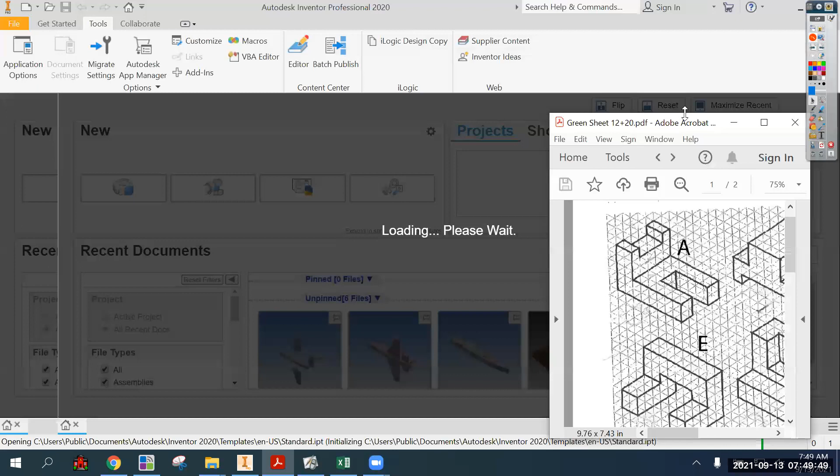So we'll start with a new part file. The first one we're going to do is part A, which we're going to do with a subtractive method, starting out with a big chunk. This is the method we'll use for most of the parts, where we start with a big chunk, the maximum dimension in all three dimensions, and then cut away what we don't want.

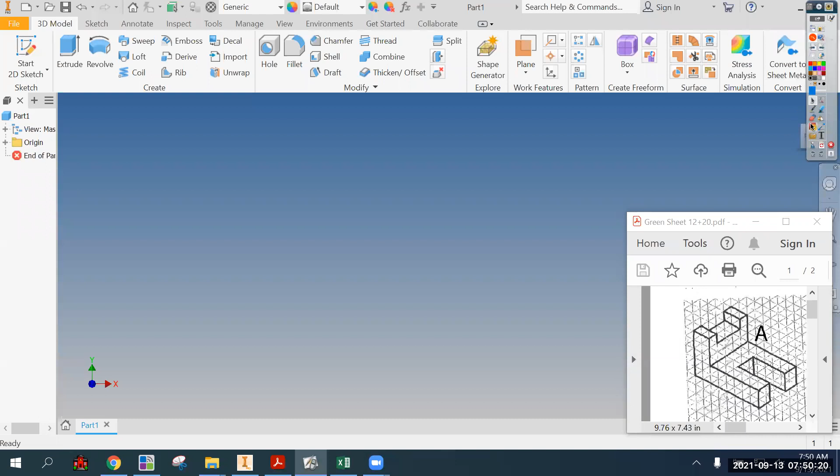We'll be doing this with each isometric grid at 1 inch instead of 1/4 inch, which is what it says at the top of the sheet. So the first sketch we need to make is this front, which is 5 by 8, and we need to extrude it 5.

So we'll go start 2D sketch and get a 2-point rectangle, and dimension that to 8 wide and 5 tall. Hit home on the keyboard to zoom out. Wait, that's supposed to be 5 tall.

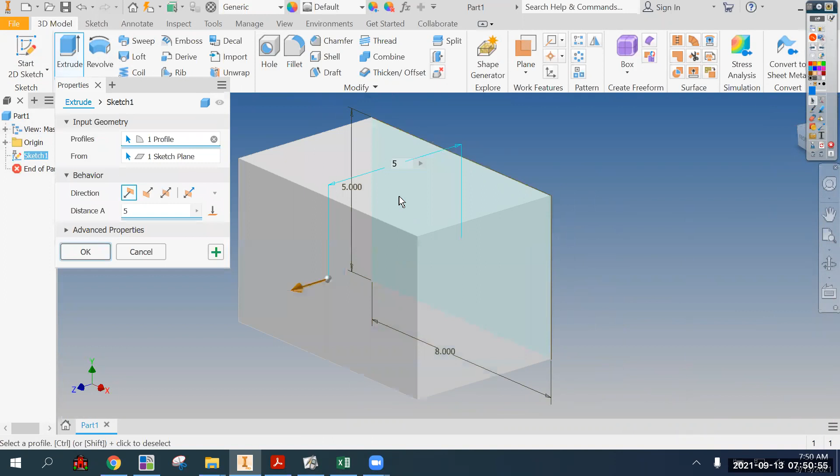And finish sketch and extrude it 5. Next part, let's cut out the L.

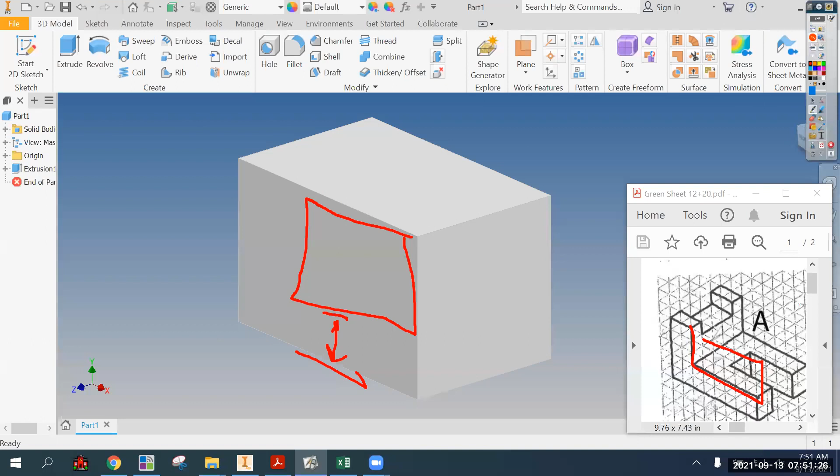We could do this a couple ways. We need to make a rectangle in the top right corner of the front face, but we could dimension the length of this line to get the height, or we could dimension the distance from the bottom — dimensioning the remainder, it doesn't really matter. So we'll do it like this, and because we need a remainder of 2 on each side, that's how we're going to dimension the rectangle.

But we need to start this rectangle from the top right, and this dimensioning is the 3-click dimensioning, where your first click is on one line. You have to think about what we're actually dimensioning: the location of this side of our new rectangle, the distance from the line to the edge. First click, second click, third click in between. Same thing here, first click, second click, third click in between.

We'll finish sketch, extrude, choose the rectangle we want to cut and switch it to cut. Through all is best practice, but anything 5 or bigger for this is fine.

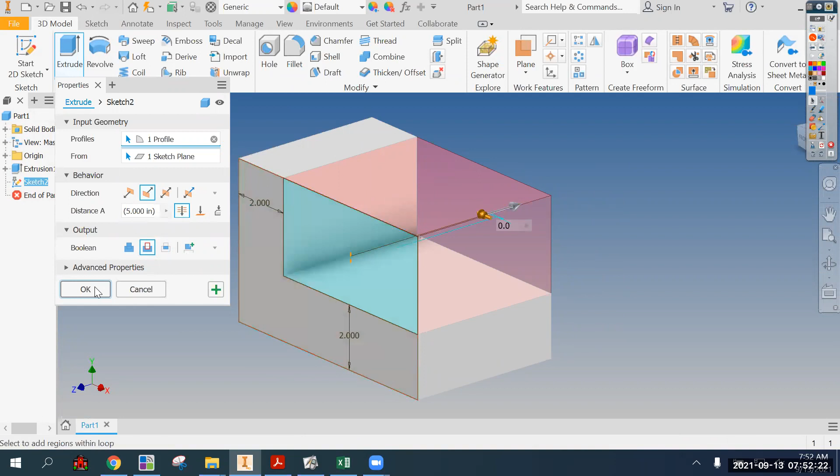That's our first cut. Second cut is going to be this rectangle here, which is 2 by 4, cut all the way through, and we're going to draw that rectangle right here. But the key is that...

We can do that same thing where we're dimensioning the remainder, and the remainder here is 1.5. It's 1.5 here, those are each 1.5, and it's 2 here, and that's all we need to know, so long as our rectangle is flush against this edge.

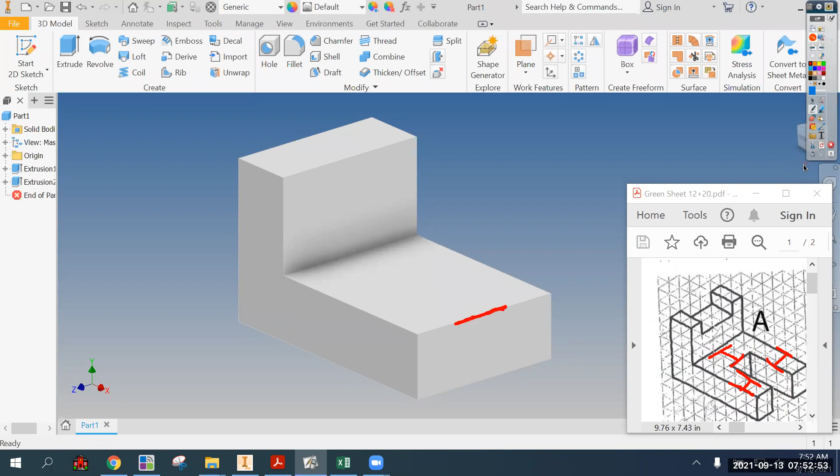So we're going to start a sketch on this face, and you don't have to rotate it, but I think of the shape more in this direction. I'm going to do this rectangle here, making sure I don't snap it to the corner or to the center point, because I won't be able to dimension it then.

Let's dimension the distance from here to here as 1.5, and the distance from here to here as 1.5, and you can sort of see where we're getting those dimensions. When you are in sketch mode and the grids are up, you should really be looking at it straight on, but just to give you an idea of where things are. Then this last part is 2 from the edge, and you can tell you are done dimensioning if it says fully constrained.

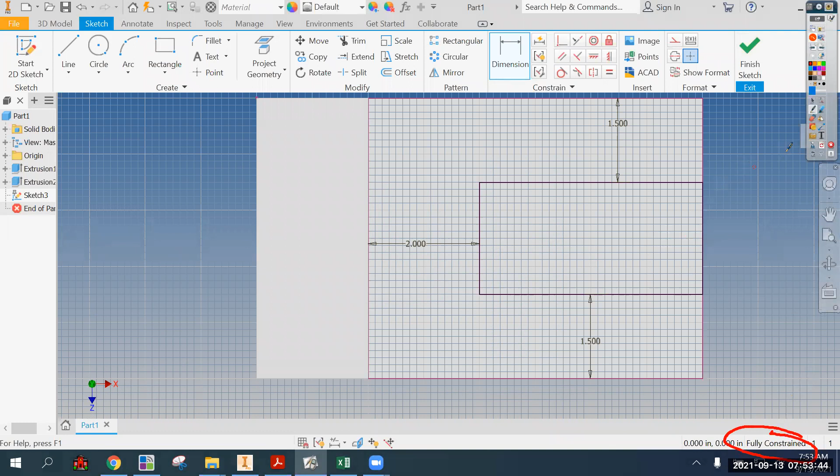And we have that. So now we can finish sketch, extrude, choose our new rectangle, switch to cut, and again it doesn't matter if it's 5 inches, 1,000,000, or through all. The last bit is a rectangle here that is 1 by 3 and 1 inch from the side.

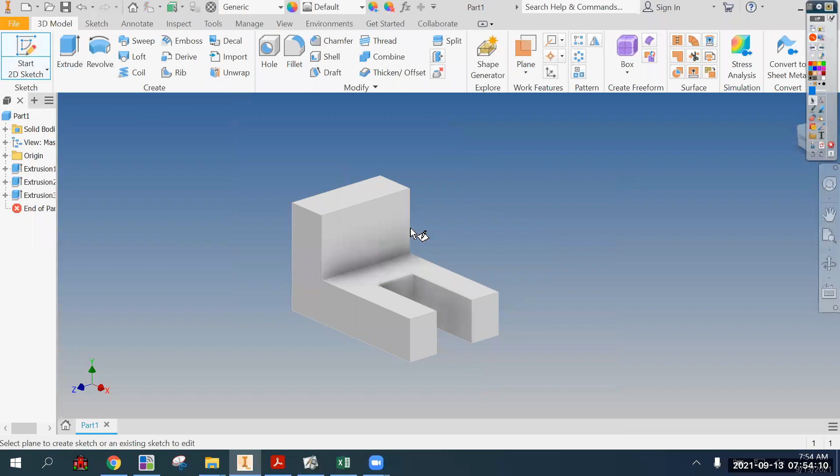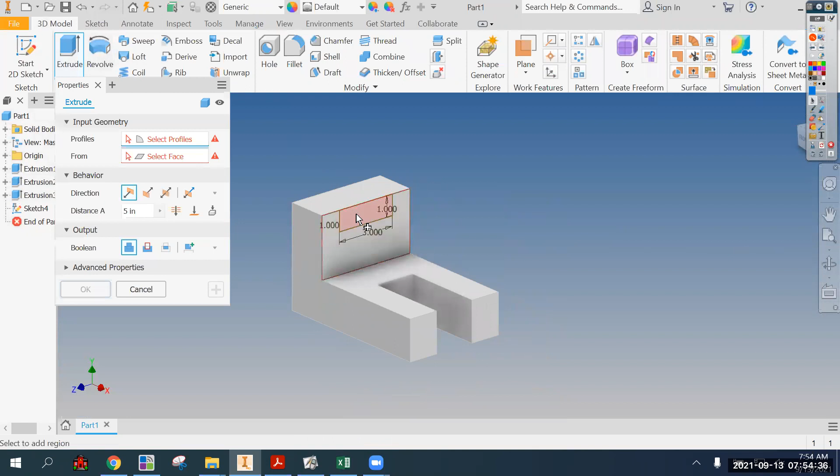And we'll do a rectangle here, and we'll just dimension it, 3 wide, 1 tall. You can see 1 dimension needed down at the bottom - we need to dimension the location of the rectangle, the distance from one side to the side, and everything is 1. We'll finish sketch, extrude, choose the rectangle we want to cut, switch to cut, through all, hit OK.

And there's part A. Okay, new part. We're going to go through these in alphabetical order, but that's not necessarily the order of difficulty, but we'll figure it out as we go.

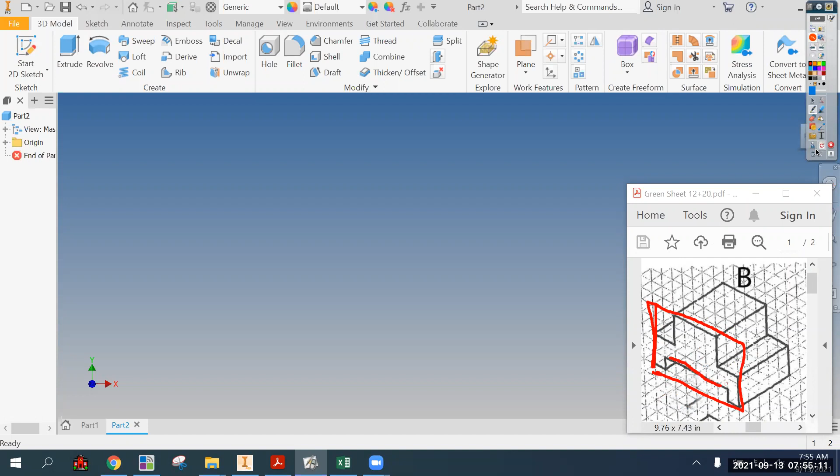This one I'm going to do in a single sketch. Well, no, that's not true. It's going to be 1 sketch and extrusion for the block, which is actually 5 tall and 8 wide. But it's kind of difficult - the isometric lines are more difficult to see when they are not an integer in height.

They're 2.5 tall here, and this line is 2.5, so the total height is 5. So it's 5 by 8 extruded 5 for our starting sketch.

Rectangle, 5 this way, excuse me, 8 that way, 5 this way. Finish sketch, extrude, choose that, switch, extrude it 5. And then we can do the cutaways in a single step.

Just like the last cut on part A, we have a small shallow rectangle here that's 1 tall, 6 wide, and 1 from the side. So it's going to be something like that.

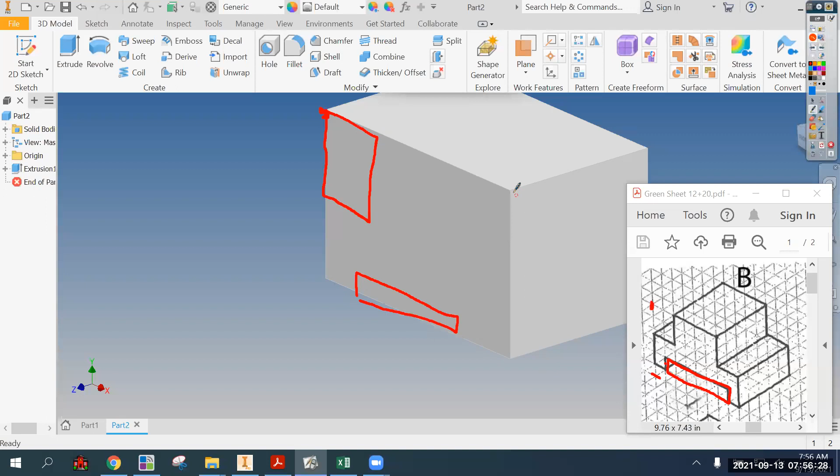And then we have symmetrical rectangles here that will start in the top corners, and they're 2.5 tall and 2 wide, which you can tell from the size of the remainder there.

And we can do all 3 of those rectangles on the same sketch because they are all extruded the same distance, which is cut all. So we have 1 rectangle here, 1 rectangle here, and 1 rectangle that's just across the bottom.

And so this needs to be 2.5 tall and 2 wide. Same thing over here, 2.5 by 2. And this is 6 wide by 1 tall and 1 inch from the side.

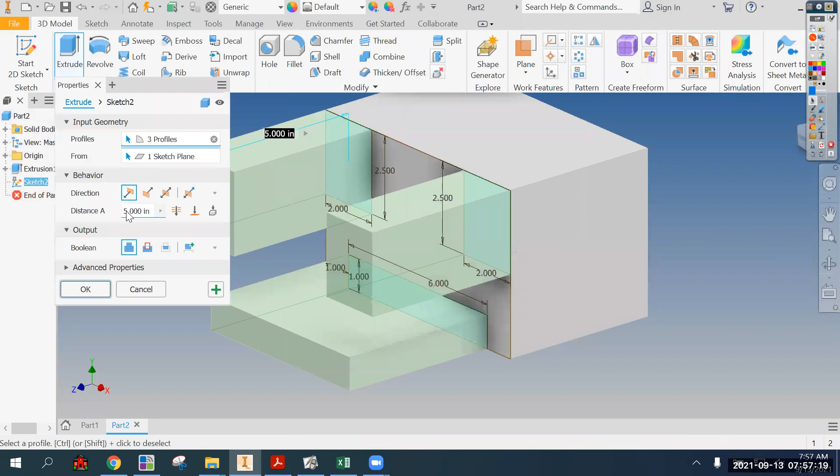3 click dimensioning there. And we can finish sketch, extrude, choose this, choose this, choose this, switch to cut, through all, hit OK, and there you go, part B.

Next one, part C. We'll do this in 3 steps: one step for the entire block, which is 6 by 9, extruded 4. Then a 3 by 4 rectangle, cut extruded 2. And then we'll do a 2 by 2 rectangle on the top and cut extrude all the way through.

So we'll do new part, sketch on XY plane because that's the front. And we're going to make this 9 wide and 6 tall. Finish sketch, extrude, and extrude it 4.

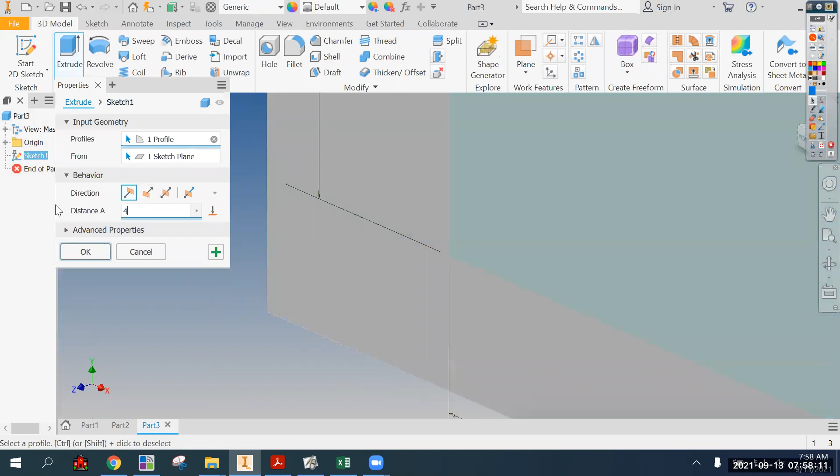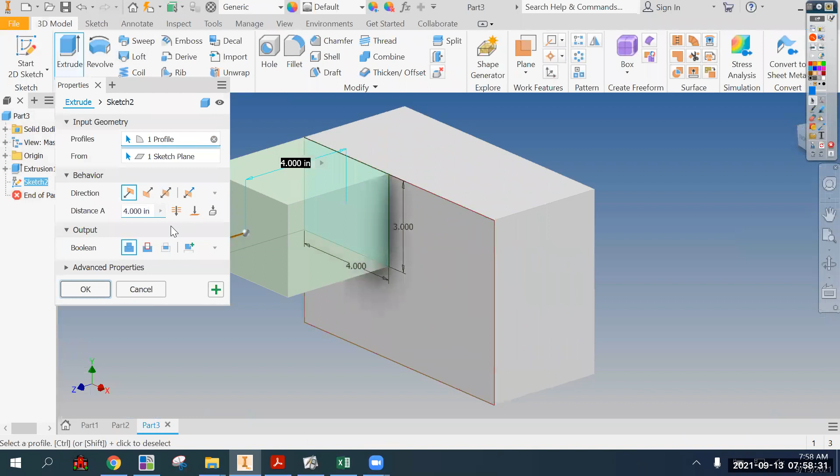Then we'll start a sketch over here, top left corner, and we need to dimension the height to 3, the width to 4, and finish sketch. Extrude, choose that, switch it to cut, and we only want to cut 2 towards the back.

Then for the other one, we'll put a sketch here. I'm going to spin it to look at it this way. And the cut is going to go here.

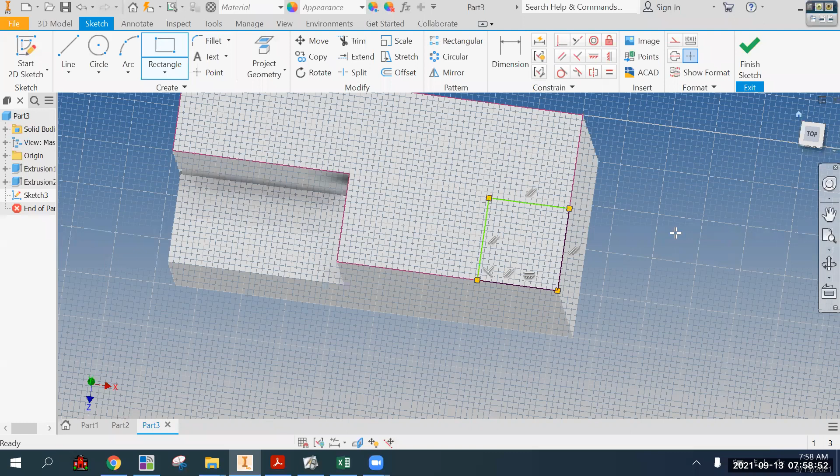And you'll see where we're sketching in this front top right corner. We'll dimension it to 2 wide and 2 tall. We'll finish sketch, extrude, choose that, switch it to cut, and we do want to cut through all on this one. There's part C.

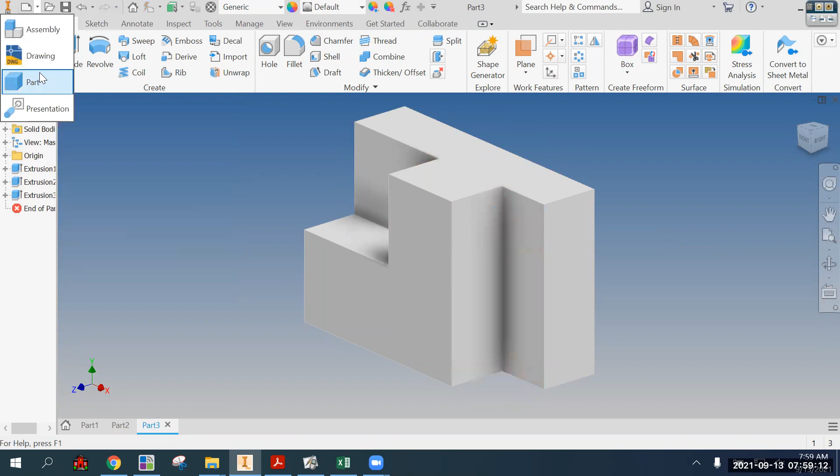We'll get through all of them, don't worry. D is - I'm going to do it in 2 steps, but no cutting, just creating.

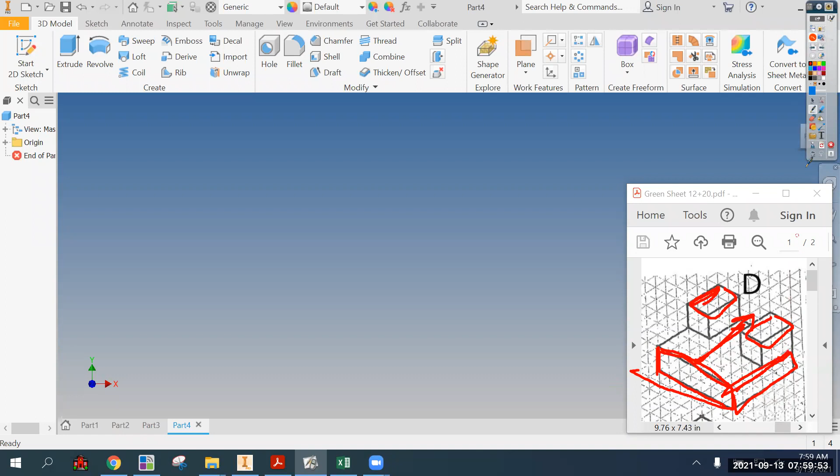First step, I'm going to make a rectangle that's 2 tall and 6 wide and extrude it 7. No, wait, 2 tall and 7 wide, extruded 6. That's important to note because that's just going to make this small bottom step. But these 2 blocks that pop up on top, their long side is on the shorter side of the base. But we'll figure this out.

Let's make a rectangle that is 7 wide and 2 tall. And that looks like that - it's pretty wide. Finish sketch and extrude it 6.

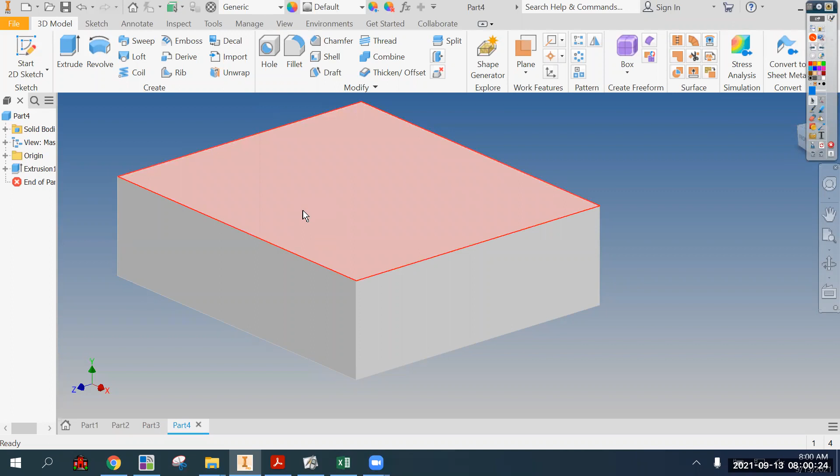I'm doing a recording, like I'm trying to get a... Wait, so you're recording right now? This is one take.

Thanks. All right, so then we need to do both of those blocks on top, and they are 2 by 3 - 3 this way and 2 this way. Same thing over here, 3 this way and 2 that way, where it's very easy to put them on the other side and have them be wrong.

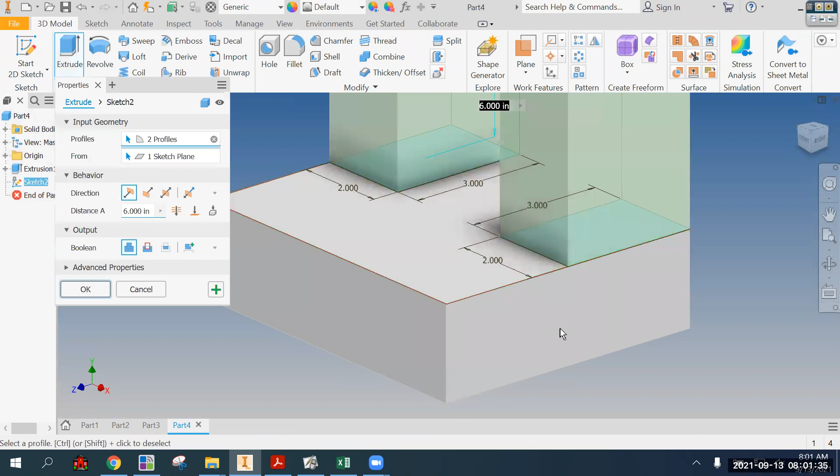So let's put a sketch on top. Again, for some reason it always twists 90 degrees off of the way I think of things, but that's up to you. Either way, we have one rectangle there and another one there. We'll dimension these - they both need to be 2 wide and 3, well, 2 that direction. Technically 2 wide and 3 deep because of what face we started on, but not super critical. We'll extrude that, and they are just a height of 2. There you go, part D.

New part, part E. Okay, part E - we'll do the full block this time, 5 tall and 8 wide, extruded 5.

Then we will cut out sort of the L shape, which is a 3 by 3 rectangle or square here, and cut it all the way across. And then the last part is kind of tricky where we'll put a sketch on this step, but the rectangle needs to be taller than the snap that you'll get automatically. Otherwise this cutout won't be correct.

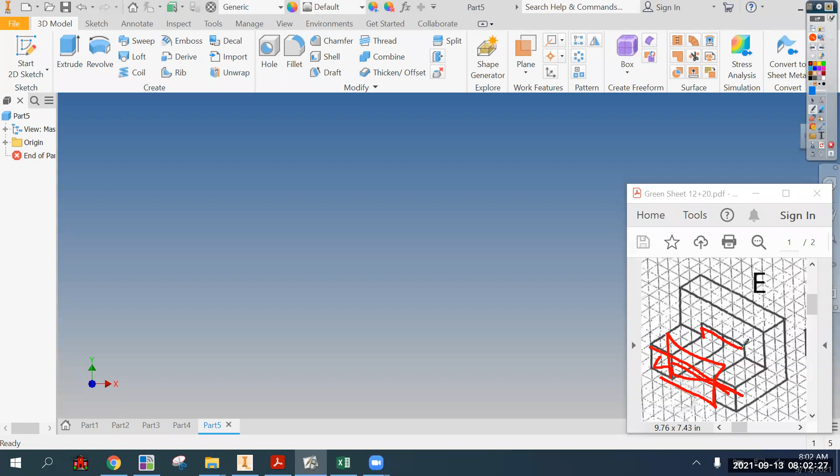So we'll start a sketch and let's make a basic rectangle for our block. It needs to be, what do we say, 8 wide, 5 tall. Finish sketch, extrude it 5.

Okay, then we're going to put a sketch on the side here that on the top front corner needs to be 3 by 3. Finish sketch, extrude, choose that, switch it to cut through all.

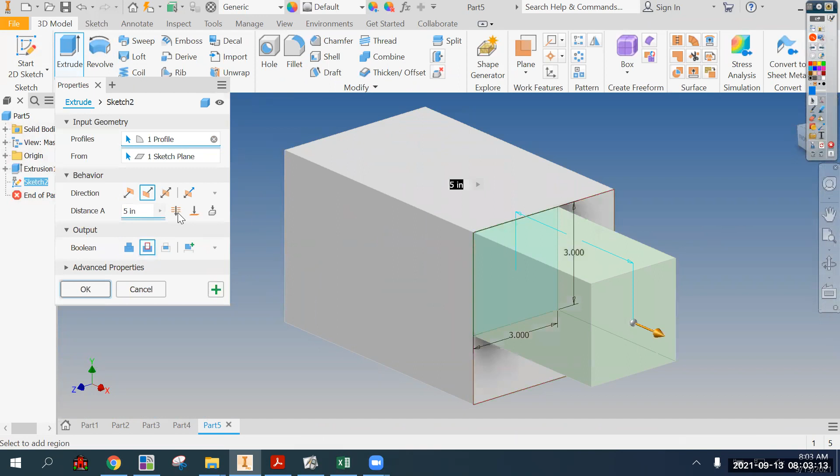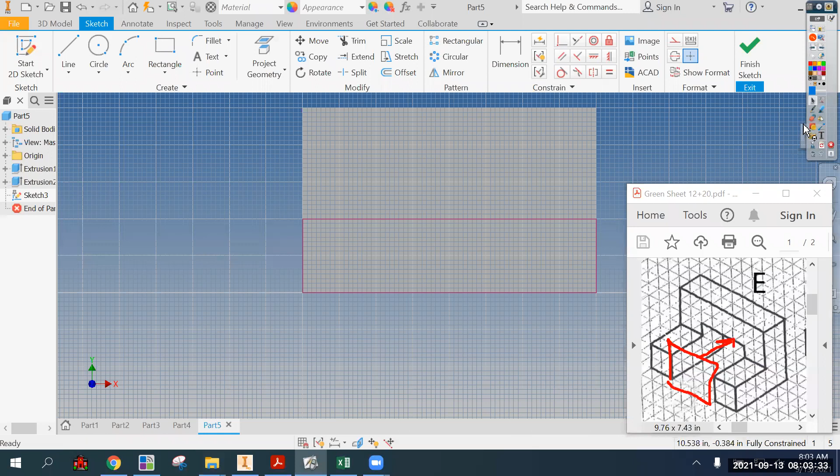Okay, and then we'll start a sketch here to do that undercut part. It is important that the height of this cut - because this rectangle we're drawing here on this face needs to cut all the way through. If you draw that rectangle so its height is on this front edge, the cut through won't be that extra one tall. I suppose you could do it in 2 steps, but there's no reason to.

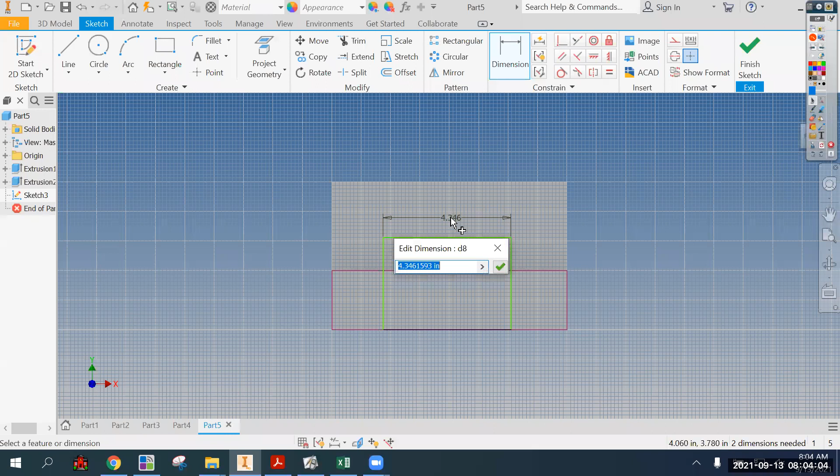Okay, so we're already sketching on this front. We need a rectangle that's flush with the bottom, but needs to be taller than this. Otherwise you won't be able to dimension it. You actually need to create the rectangle that size. And the rectangle is 4 wide, 3 tall, and the distance from the side of the rectangle to the side of everything is 2.

We'll finish sketch, extrude. Make sure you choose only the parts you want to cut. Switch it to cut and through all, hit OK. Part E. New part.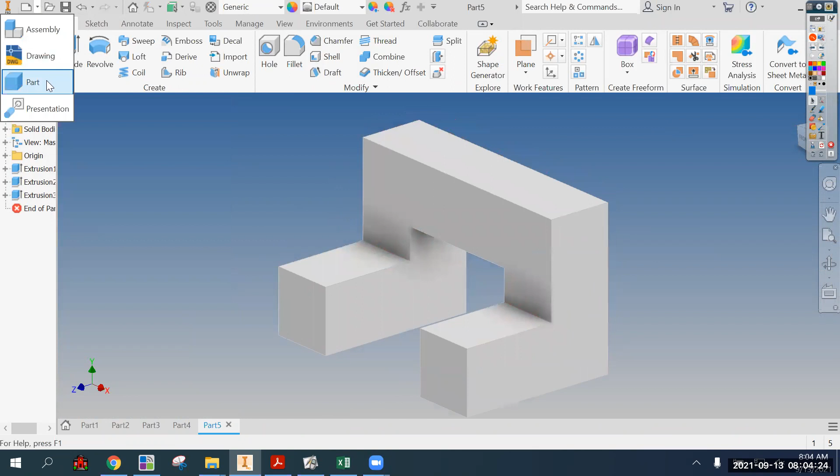F. Okay, F we can do very similar to part E. Start with a chunk that across the face is 6 tall and 2, 4, 2, 8 wide. Extruded 5.

Start with a sketch and rectangle. 8 wide, 6 tall, finish sketch, extrude, and it is 5 front to back.

Then let's do this L-shaped cut, which is just like part E, where we'll put a sketch on the side that is 4 tall and 2 deep, and cut extrude all the way across.

Oh no, that's not what I want. I want sketch on the side, that on the top front we can have a rectangle that is 4 wide, 4 tall, 2 deep. Finish sketch, extrude, choose that, switch it to cut, and through all.

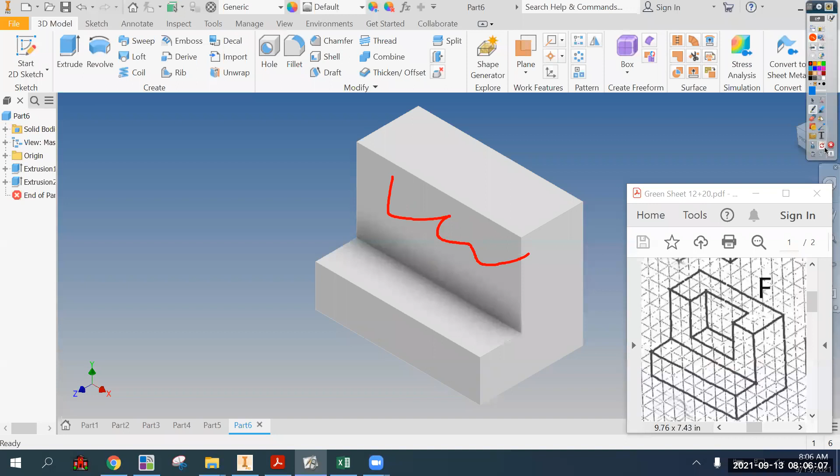Okay, and the last part feature is we could put a rectangle on this face, and that rectangle needs to be 3 tall, 4 wide, 2 from the side, and the cut is 1.5.

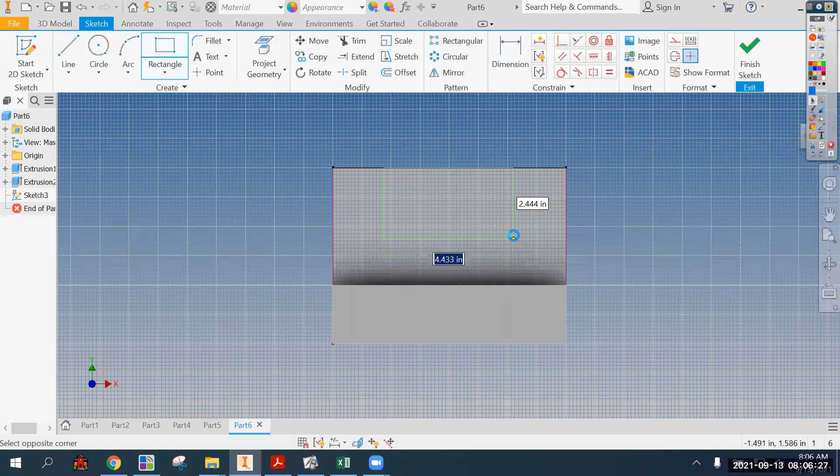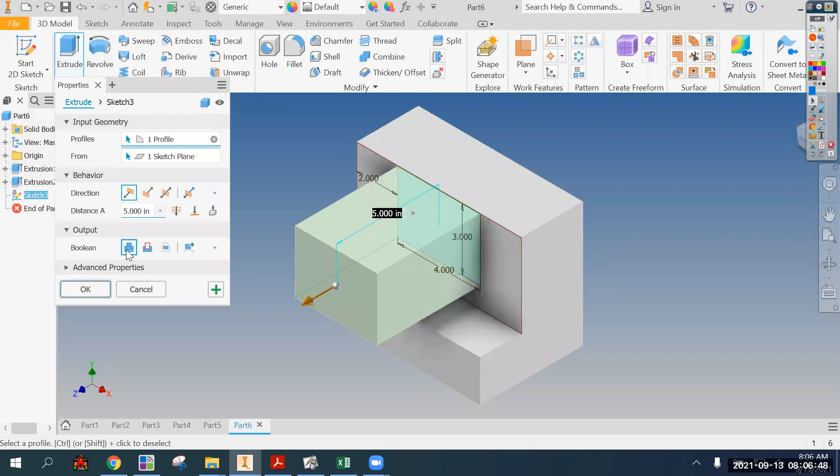So we'll start a sketch right here. Rectangle needs to be flush to the top. I say 3 tall, 4 wide, and the distance from the side of the rectangle to the side of everything is 2. We'll finish sketch, extrude, and choose that, switch it to cut, and the cut distance is 1.5.

Okay, part F. Okay, for part G the way we're going to do it is we're just going to create 3 blocks. First block is 3 tall and 2 wide, and we're going to extrude it 5.

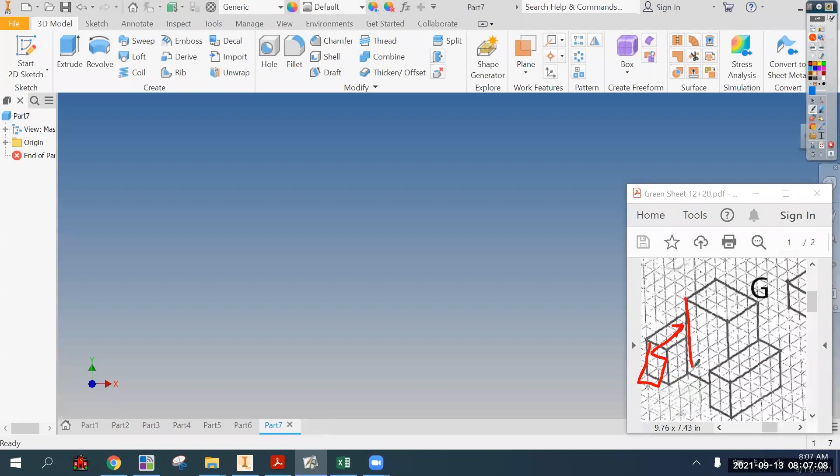Then we're going to draw a rectangle that is sort of the side of G and extrude it this way. And then we're going to draw a rectangle that's this other side and extrude it 2 more. So let's start with the front face. Rectangle is 2 wide and 3 tall. We'll finish sketch, extrude, and extrude it 5.

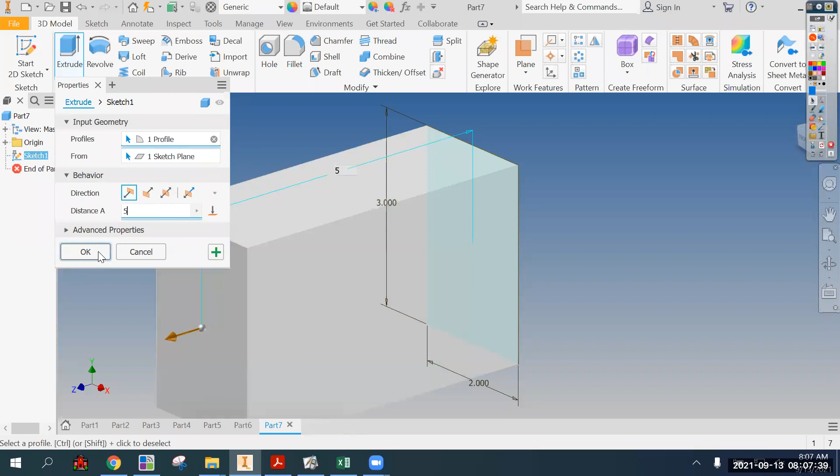Okay, that's sort of the left arm shape. We'll put a sketch here and a rectangle that is taller than what we have, but not wider or deeper. The dimensions need to be the height of this part and the depth, which is 5 tall, 6 tall, and 3 deep. We're going to extrude it 4, bringing it out to the right a distance of 4.

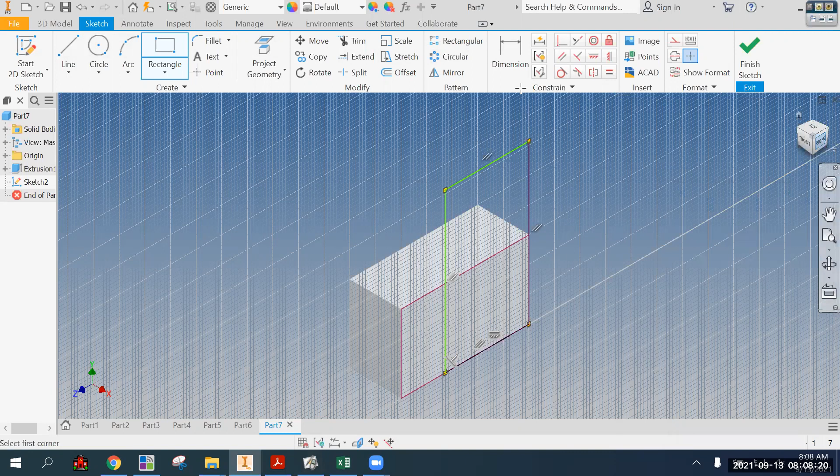We need to look at this from the side, and we'll dimension this to 6 tall and 3 deep. Let's extrude this part, and let's extrude it 4. Then the last portion, again we're just going to make a rectangle on the side, starting from this back edge, 5 to the front and 3 tall, and then pull it out a distance of 2.

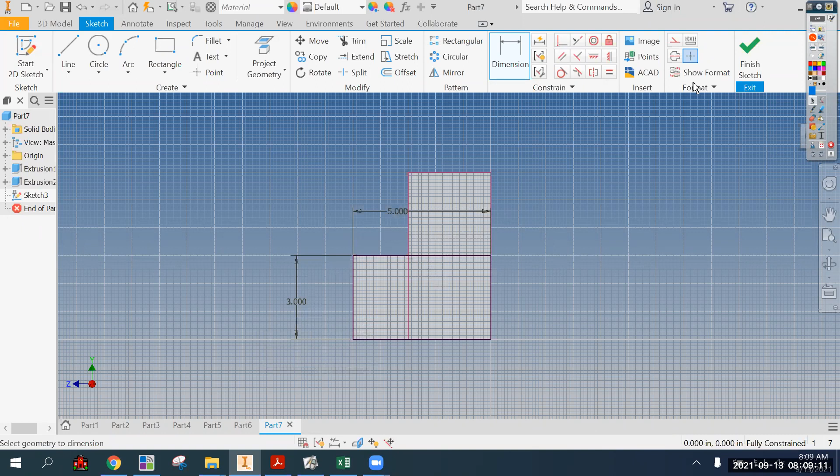Start a 2D sketch on this side, rectangle from the bottom here, needs to be 5 front to back and 3 tall. We'll finish sketch and extrude this, and we only need to extrude it 2. And there you go, part G.

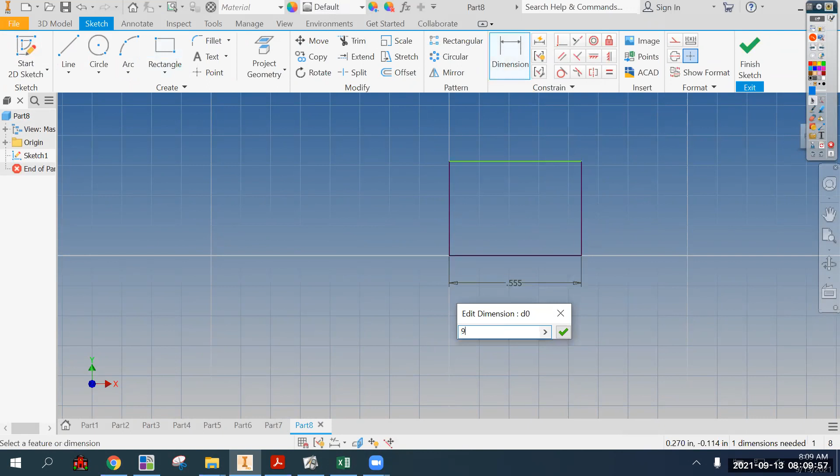New part, part H, is a little trickier, I think. Not terrible. Okay, we'll do the full block, which is 6 tall and 9 wide, and extrude it 5. Rectangle, 9 wide, 6 tall, finish sketch, and extrude it 5.

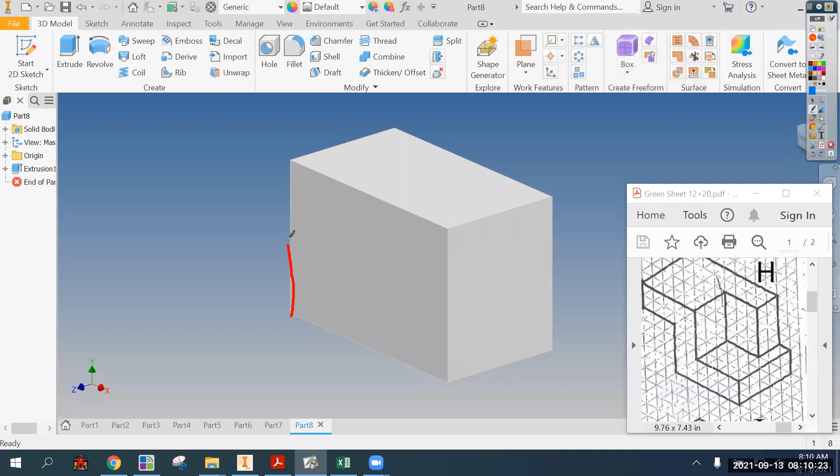This has to be done in 2 steps because of just the way extrusions work. We're going to put 1 sketch on the front and draw the rectangle over here, that is 3 wide and 4 tall, and extrude it all the way through. We'll do that first. Then the next step will be putting a sketch on the top, which is going to be a combination of 2 rectangles like that, and extruding its height, or the height of the cut at least.

So we'll start a 2D sketch here, and we need a rectangle that starts here in the bottom left corner. The height is 4, the width is 3, and we'll finish sketch, extrude, choose that, switch it to cut, cut all.

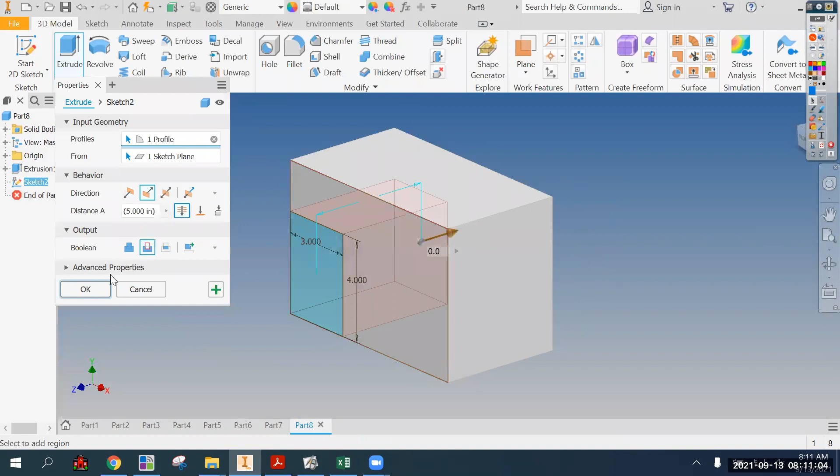Okay, and the next part, we're going to put a sketch, like I said, on the top, made of 2 rectangles. This one is 3 this way, and well, you can see this is the shape that we're making. This ends up being the step, but we need to draw it up here and extrude it down a height of 4.

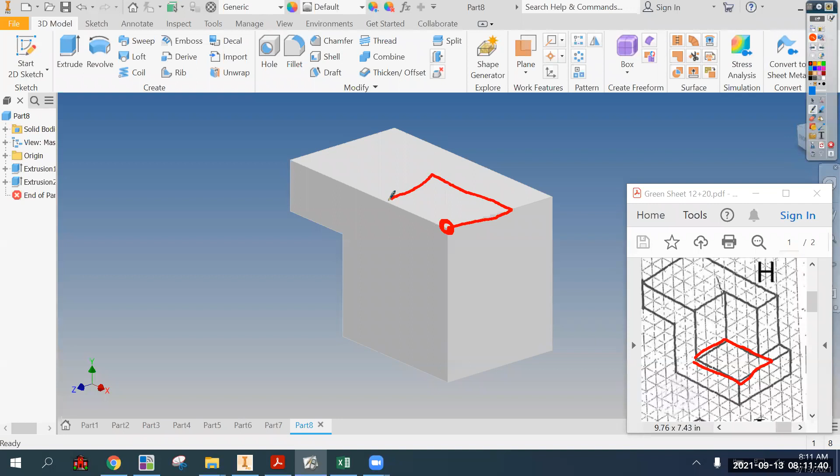We're going to make this shape with 1 rectangle that's 3 this way and 4 that way, starting in this corner, 4 this way, 3 that way, and 4 this way. Then another rectangle starting in this corner that's 1 left to right and 2 towards the front. So 1 that way and 2 that way.

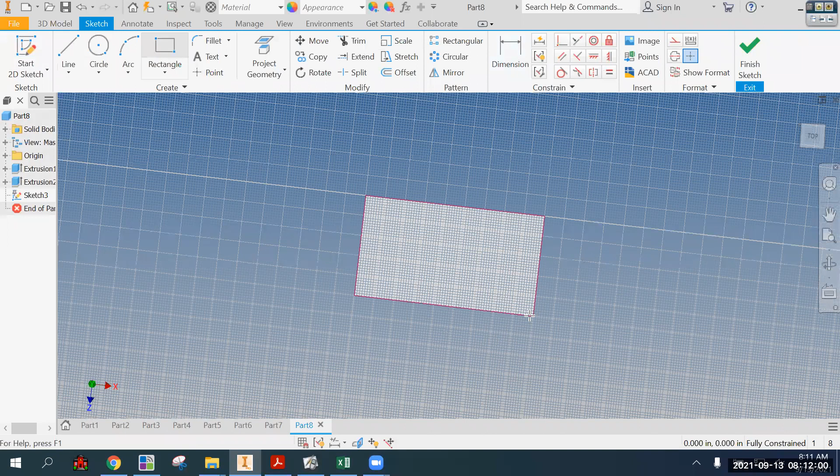So let us start a sketch here and rotate it, get a rectangle from here. This rectangle needs to be 4 this way, 3 this way, and then another rectangle from here, which we can snap to the corner. If we snap this to the other line right there, we don't have to dimension the height, because when we snap it to that line, it's going to be locked in as 2.

Just make sure you don't snap it to the middle point of this line. Then we need to dimension the width of this rectangle, and we're going to do that with a 3-click process: the distance from here to here—hit the wrong button—the distance from here, first click, here, second click, and third click in between needs to be 1.

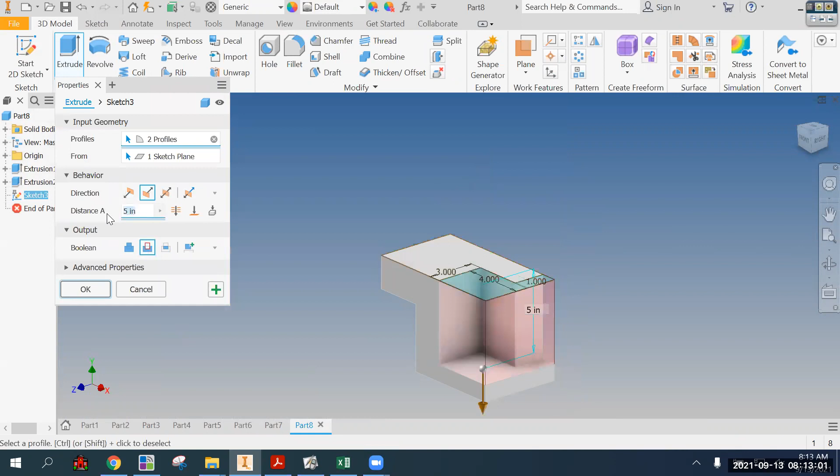We'll finish sketch, extrude, choose that, and choose that, and switch it to cut. Our cut is 4 down from the top. Hit OK. There you go, part H.

Part I and J, we're going to do with just lines. The key to the line tool is making a line, dimension it, making a line, dimension it. Don't make the entire shape and then go through dimensioning, because it may guess the wrong way to extend the lines. So just to save you some trouble, do it all: draw a line, dimension it, draw a line, dimension it.

So our dimensions here are going to be 9 across the bottom. So we'll draw a horizontal line that's 9, a vertical line that is 6, a vertical line that's 2, a horizontal line that's 5. And then for any slanted line, we don't need to dimension it, because if you know where a line starts and where it ends, that's all you need to know.

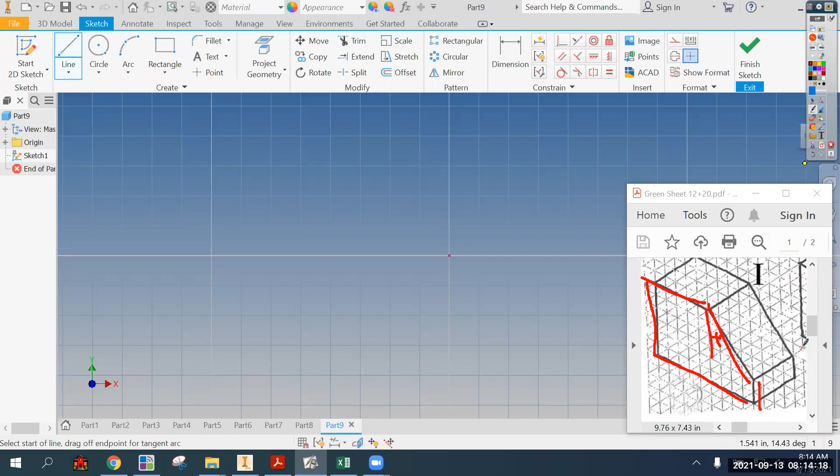We don't need to figure out the angle of the line or its length off vertical - that's one way to dimension and constrain a sloped line, but we don't need to, because we're going to use regular dimensions.

So we'll do a horizontal line, get the dimension tool. Make sure you snap it to horizontal, otherwise it won't work. We'll get a line, draw a horizontal of any length, because we're going to dimension it. This line needs to be 9.

And then another line - for those who have been doing click, drag, release, it won't work here, because if you click to start your line and drag it, it will give you an arc, which is not what you want. You actually have to click to start a line, mouse down, mouse up, move your cursor, and click to set the line. We'll dimension this to 6, and do another line from here straight up - this line needs to be 2.

And you can see as you go along it's going to say fully constrained, and that's the goal. We'll need a horizontal line, locked to horizontal. This needs to be 5.

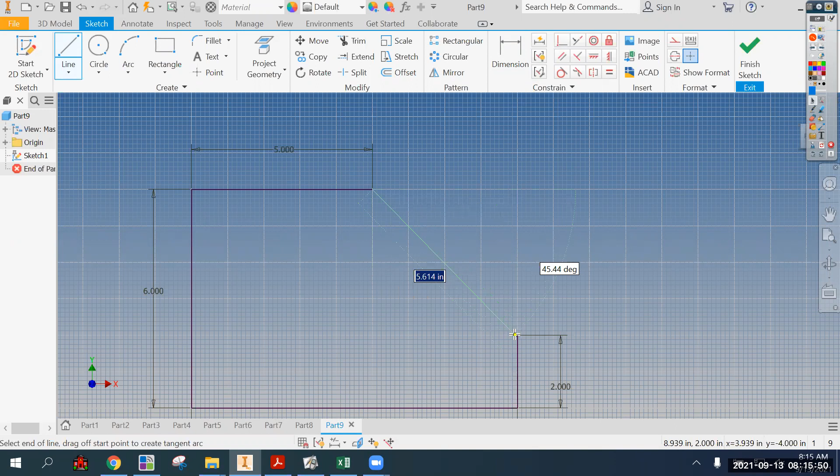As long as your line, first click, snaps to a green dot - the green dot means it's locked in, not just on that line, but the end point of that line. First click, and the second click is the green snap at the end point of this line. Finish sketch, and we need to extrude it, its depth, which is 4.

And there you go, part I. Part J is much trickier. It's going to be just like a single sketch with a single extrusion.

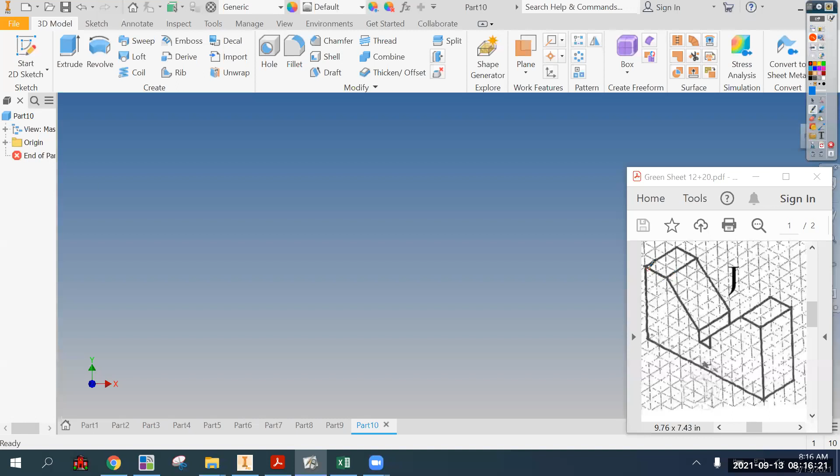And we're only going to use the line tool. But the tricky part is that this sloped line - in order to know this slope line, or this one, we need to know where it starts and where it finishes. And we don't know where it finishes until we do this part here.

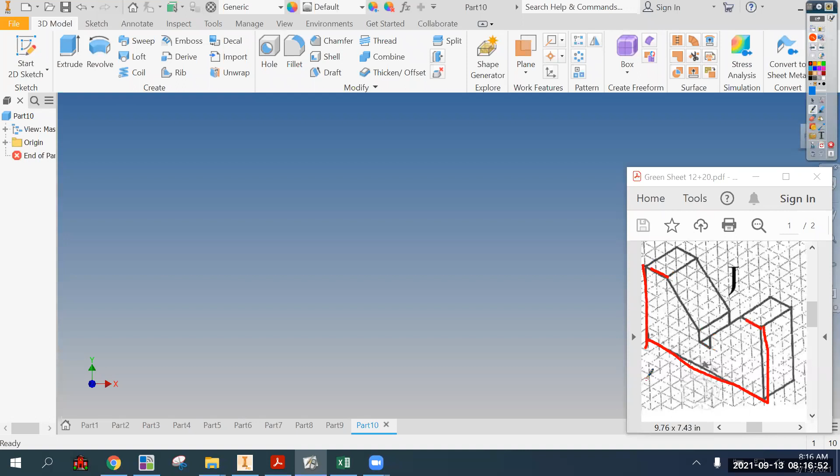But we're going to start with what we know concretely. We know that we can draw a horizontal line that's 11, a vertical line, a couple vertical lines that are 6, and a couple horizontal lines that are 2. And then we'll worry about the next part.

So we're going to sketch on the XY plane, line tool, starting at 0,0, draw a horizontal line, make sure it snaps to horizontal. This needs to be 11. And then first click here, vertical, we'll set that to 6.

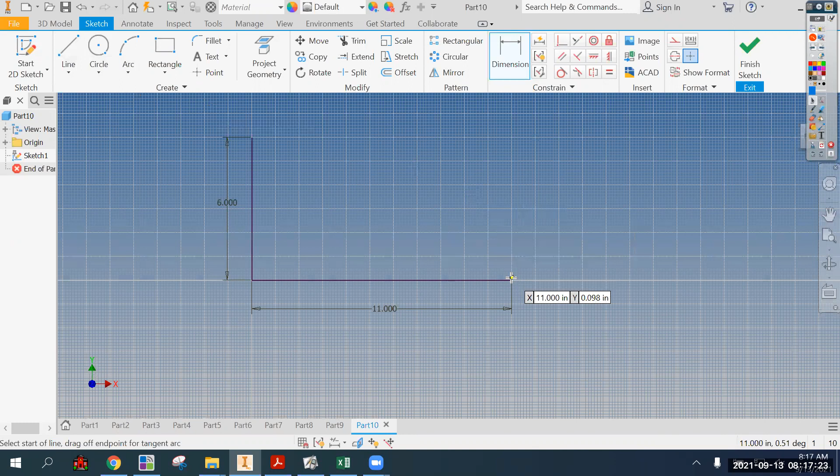And line tool. This needs to be 6. And then a couple of horizontal ones that are here that are 2. And another line from here that is 2.

And like I said, normally we would just work our way around to try and find the other part, but we don't know where to click here. So we need to create this sort of trough shape here, which is just 3 one-inch lines.

But once we draw a 1-inch line, a 1-inch line, another 1-inch line, all snapped to horizontal or vertical, we still need to tell it where it needs to be, which in this case the bottom needs to be 2 inches off the bottom of everything, and the left side needs to be 5 from the side of everything.

So let's go ahead, line tool, just make something that looks roughly right, like this. Most importantly, snapping to vertical or horizontal. This needs to be one this way. This needs to be one this way. This needs to be one this way.

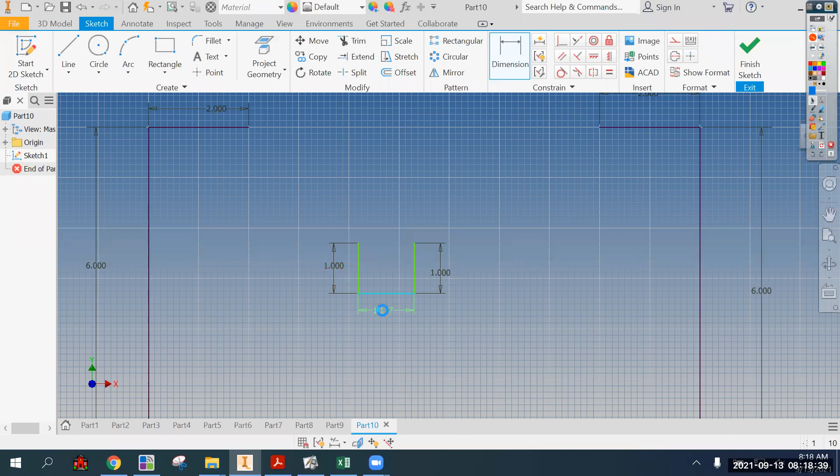And the 2 dimensions needed are the distance from the bottom of this to the bottom of everything - that needs to be 2. And the distance from the left side to the left side of everything needs to be 5. You can see it says fully constrained.

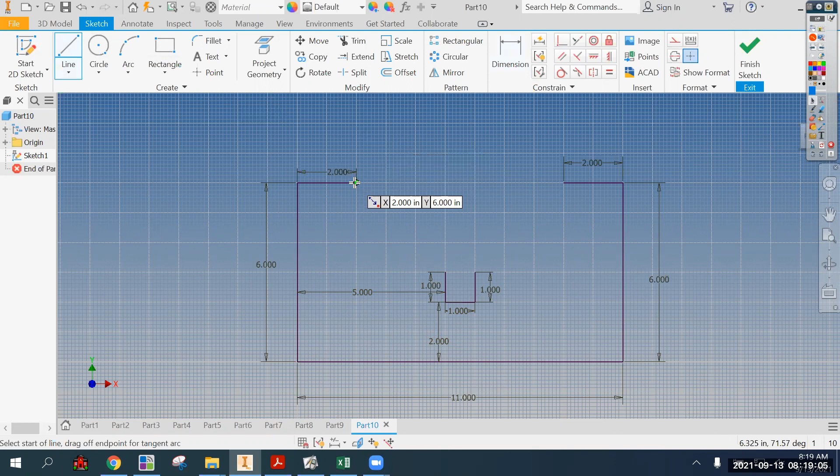And now we can draw our sloped lines because we know where the lines start and where they finish. And like I said before, you don't need to dimension the length of this line, you don't need to dimension the angle of this line - it's all built into our existing dimensions.

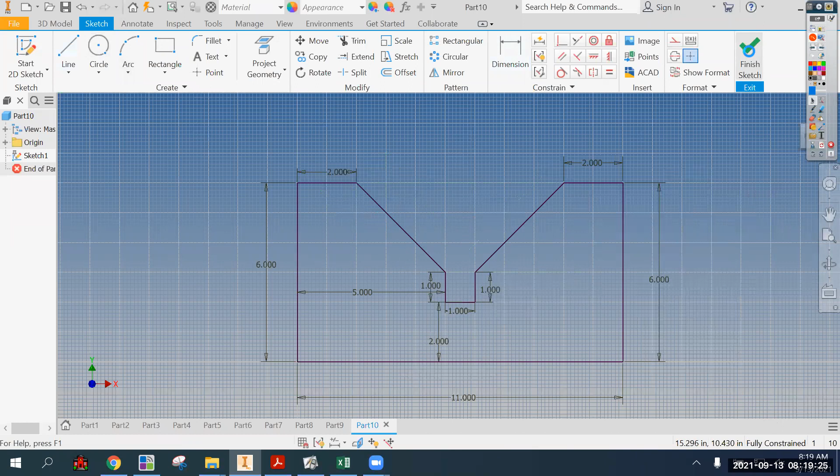And once we have that fully constrained, finish sketch, extrude, and extrude it 3 front to back. Okay, only 2 more.

K is pretty simple. We'll do the full block, which is 6 by 8, I think, and extruded 5. And then we'll do a simple rectangle, 4 tall, 6 wide, and extruded 3. And then we have a sloped line that we'll do a cut extrusion on.

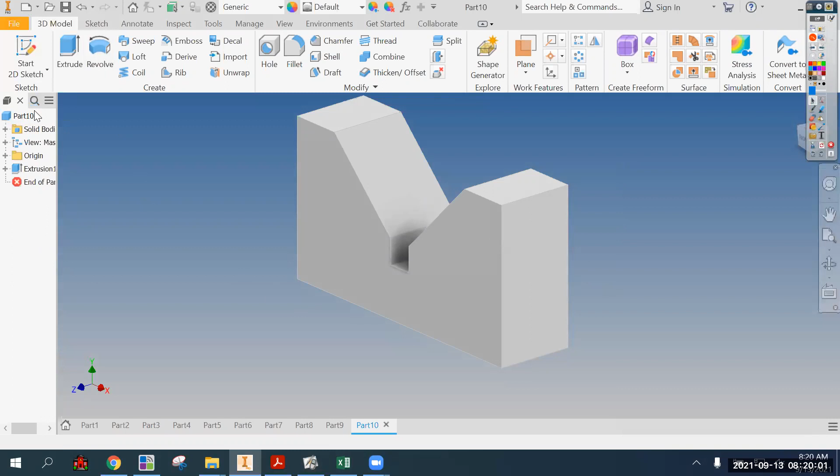So let's do a new part, sketch, face of the front, which is 6 tall, 8 wide, finish sketch.

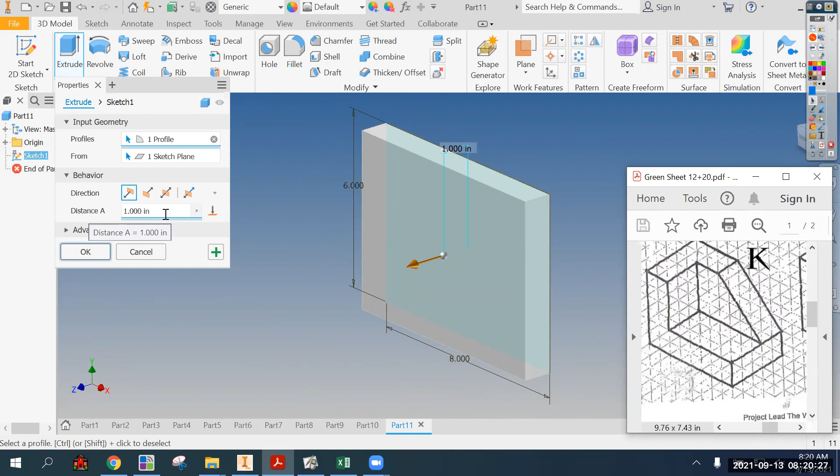And extrude it. What did I just say? 5... 6... No, 5. Extrude it 5.

Okay. Then the L part is 4 tall and 6 wide.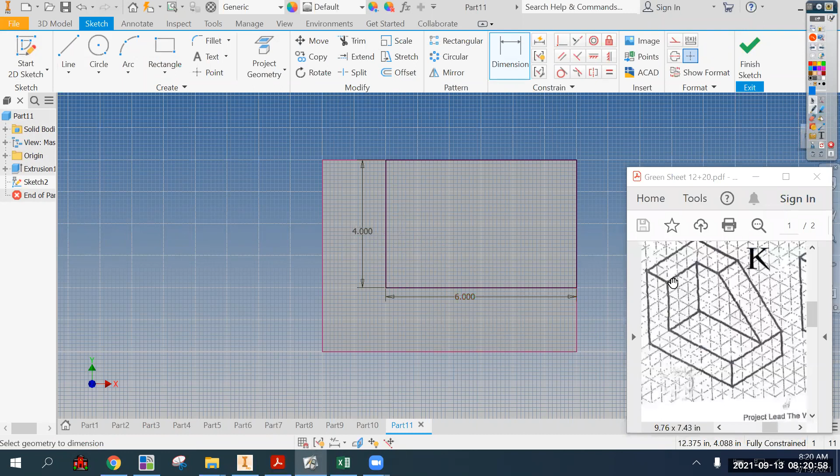Four tall, 6 wide, and let's cut extrude it. Its distance front to back, which is 3. Finish sketch, extrude, choose this, and change the cut distance to 3. Switch it to cut and other direction. Hit OK.

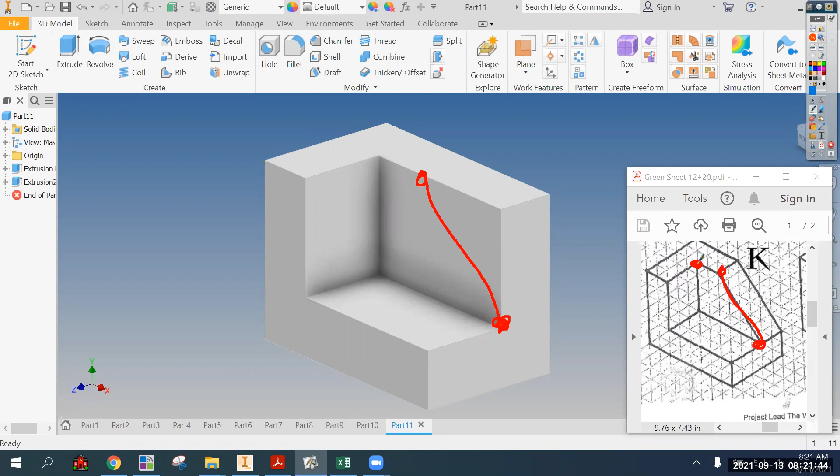And then the last part is a slanted line. We're going to put a sketch on this face, and the sloped line we need to create snaps to this bottom corner. So we don't need to dimension the endpoint of this line here, but we're going to draw it up this way, and the other endpoint will connect to, or will be 2 away from here. So we will need a dimension from endpoint to endpoint, or from the corner to the endpoint of the line.

So we'll put a sketch here, get a line, and snap it to this bottom corner here. The other snap needs to be the top edge, but don't snap it to the middle point of this top edge. You should get a green snap somewhere on the top edge. I don't know why it's not doing that. And don't snap it to the corner here, just put it right there-ish. Once again, you can see where we are sketching roughly.

Almost done. We want to dimension the distance from here to this corner. Well, it's really to this side here. I don't know why it's not giving me a snap there. That's strange, but it's that distance. You can dimension the distance from a point to a line or to an edge. It works the same way, and that needs to be 2.

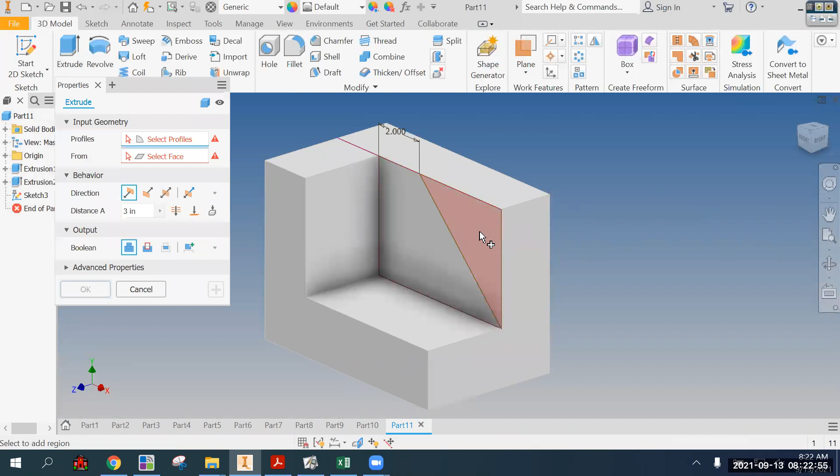And we'll finish sketch, extrude, choose this side, and switch it to cut and cut all. And that is part K. And next is, and finally, is part L.

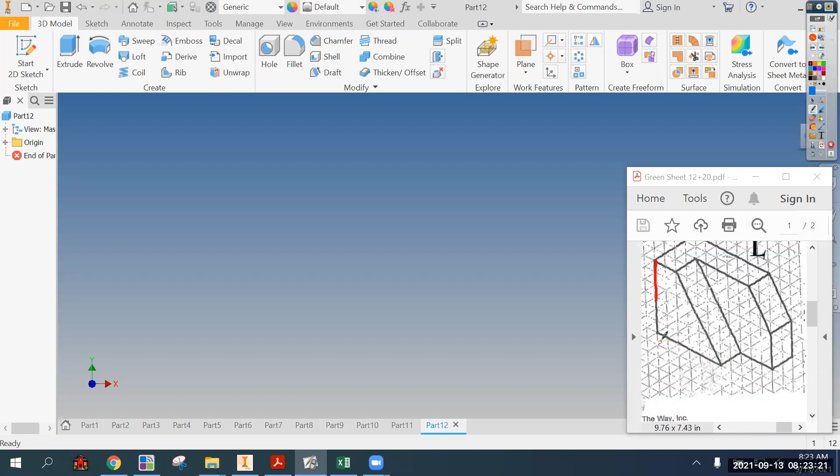Part L will do the full chunk, which is how tall is it? It's 6 tall, I think. Is it 6? Yeah, 6 tall and 1, 2, 3, 4, 5, 6, and 9 wide, extruded 4.

So we'll start a sketch on the XY plane, get a rectangle, 9 wide and 6 tall, finish sketch, extrude 4.

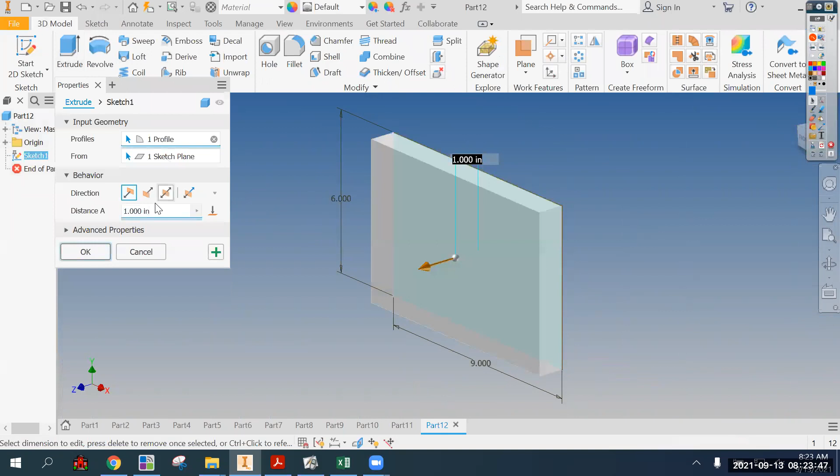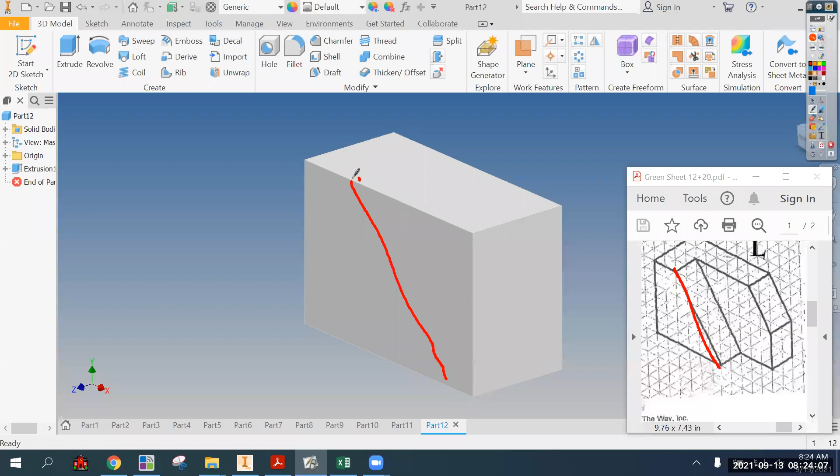Next, what we're going to do is draw a line. We'll put a sketch on the front. Oh, that's not what I want. Put a sketch on the front here and draw a slanted line. We're going to dimension the locations of the endpoints of the line. So first click, we'll do a sketch. This endpoint needs to be 2 from this side. And this endpoint needs to be 6 from the side, dimensioning.

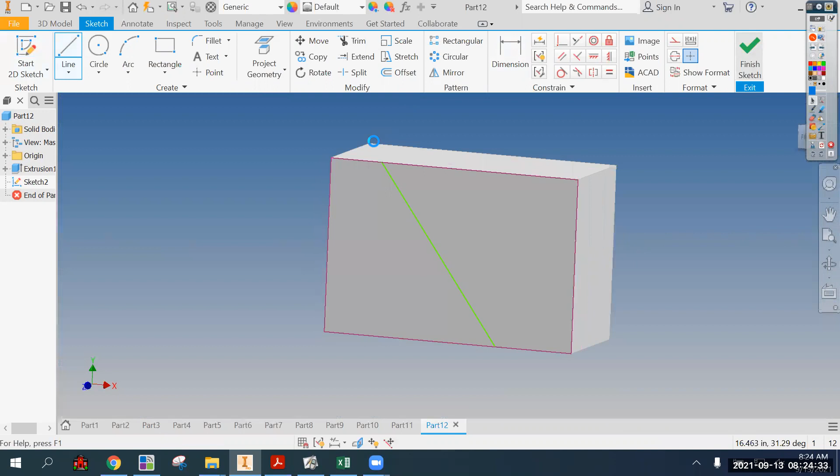Let's start a sketch on the front. Get a line from the top edge to the bottom edge, not snapping to center points. That's not what I meant to do. Not finished sketch yet. Dimension the endpoint here, first click, to the endpoint here, second click, third click to set it. That needs to be 2. The other dimension is from this endpoint to the corner. First click, second click, third click to set it, 6.

And we're going to cut away everything on the right side. So finish sketch, extrude, choose that, switch to cut, and cut 2. Hit OK. And then the last part, we need another sketch on this face.

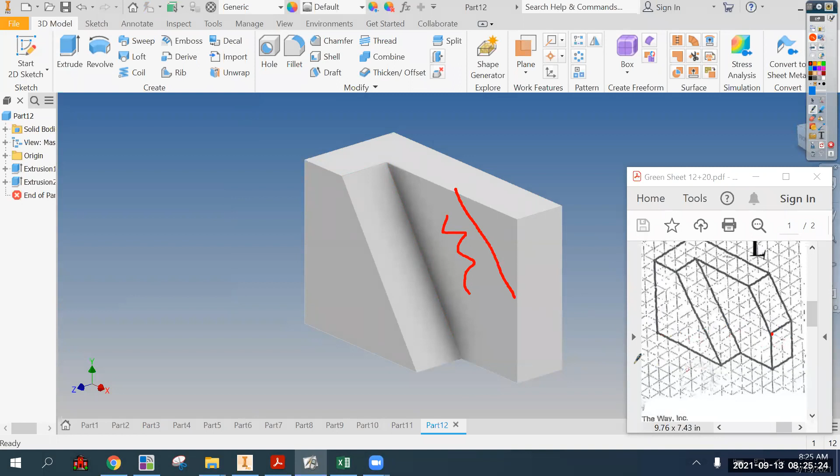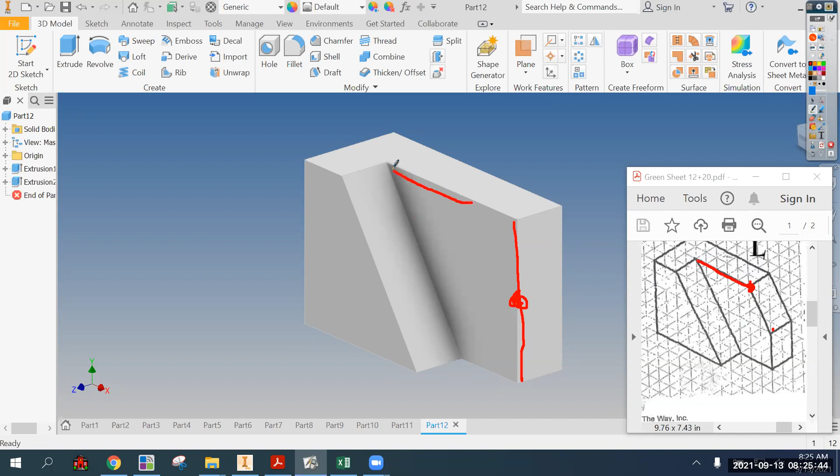The line is from here to here. This line is 3 off the bottom. And because the height is 6, that point, that's 3 off the bottom, is actually the center point of this edge. So we can get a green snap exactly on that center point, and we don't need to dimension that endpoint. We do need to dimension this endpoint, which is 2 from that corner. That'll be an endpoint to endpoint dimension.

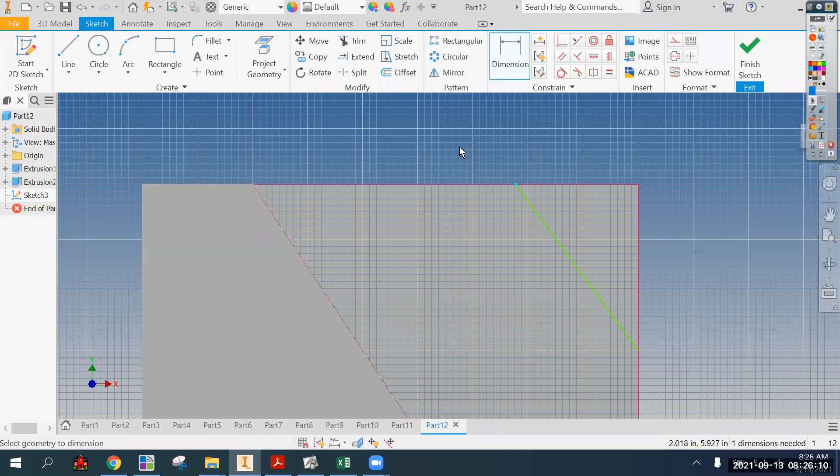We'll get a line from here, first click, snap to the green center point, second click, just snap to the edge, not the center point here. And we need to dimension, like I said, the endpoint, this endpoint to the corner. That's strange, it doesn't give it. So we can dimension the other way, which it needs to be 2 from the edge this way.

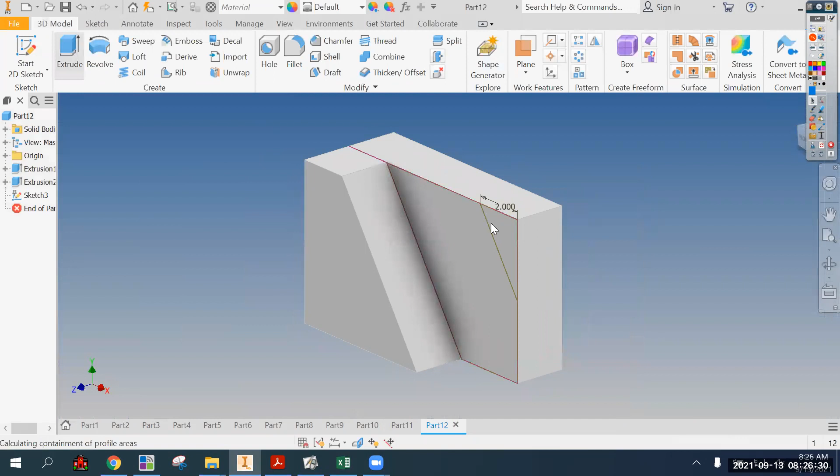So we can dimension the distance from the endpoint of the line to the corner of everything. That needs to be 2. And we will finish sketch, extrude, choose what we want to cut, switch it to cut, cut all, hit OK.